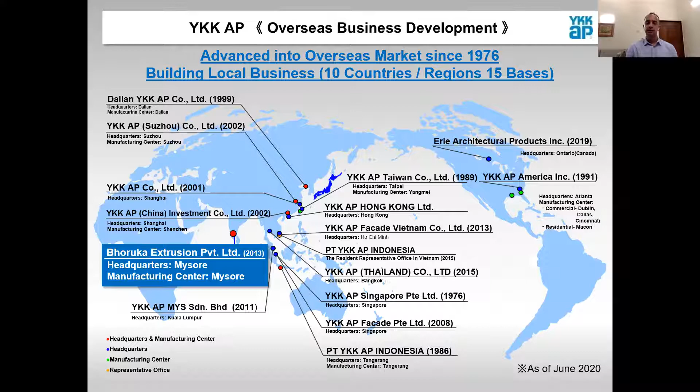Some of the accolades that we have received over the years in countries spread across the globe. For example, in the US, we have received the Product Innovation Award for 8 consecutive years. We have a very diverse portfolio in the US, right from doors and windows to curtain wall, hurricane windows, thermal break unitized curtain wall systems, which are very, very important for energy conservation. In Taiwan, we have been rated the top brand for 8 consecutive years. In Indonesia, we have won the award of top property for 2 consecutive years. And including various awards in China. This goes to show that YKK AP really understands the local market that we operate in. And once we understand the local market, we launch products over the years that are suitable to the local market, to the local climatic conditions, to the cultural influences of how people operate the windows, what they prefer.

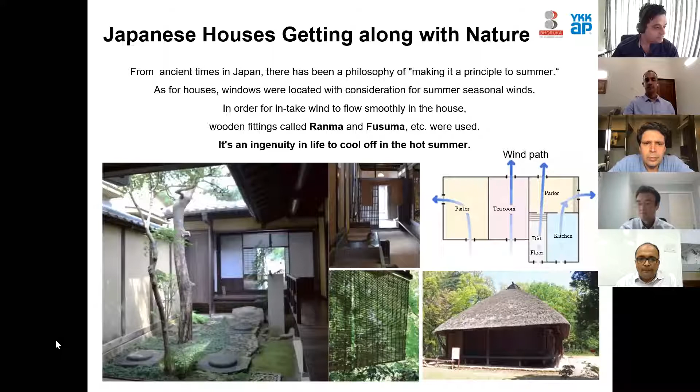These are the 5 ways in which the house can be comfortable with windows. First is to create air inlets and outlets. Second is to capture the wind according to the wind direction. Third is to increase the air vents.

Fourth is safe ventilation and consideration for safety. And fifth is to create a quiet environment. So I'll be explaining in detail about all 5 topics.

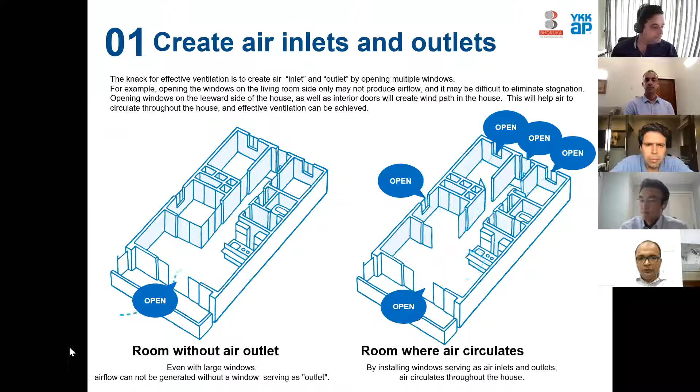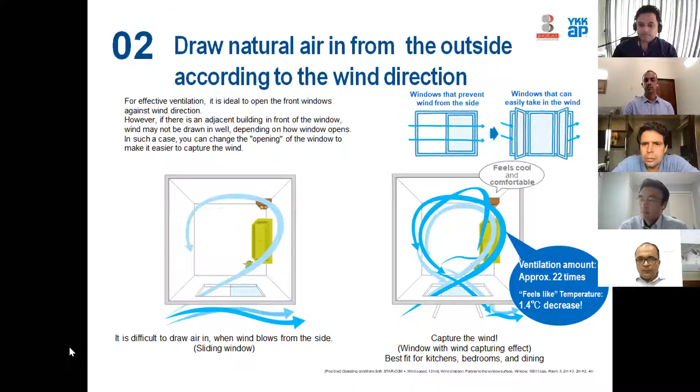This slide shows when the sliding window is replaced by a casement window, there is more ventilation as compared to a house having a sliding window.

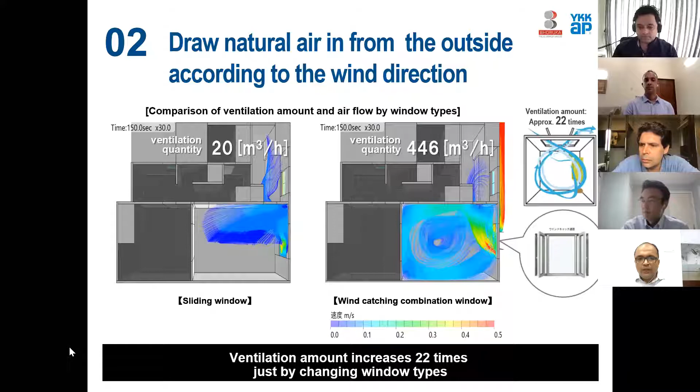We should also have an increase in air. The left side picture shows that air flow is less, and on the right hand side it shows the air flow is more because the intake and outtake of air is more.

So we can replace a standard sliding window with a sliding window that has a casement on the top.

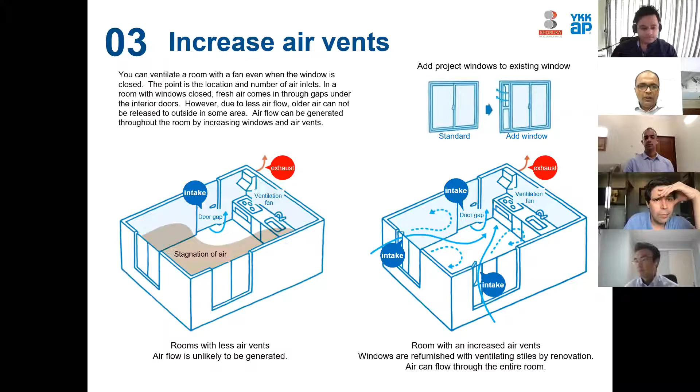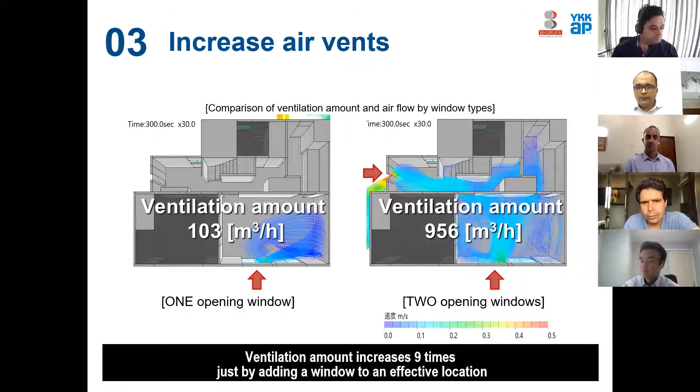On the left hand side, the photo shows there is opening of only one window, and on the right hand side it shows opening of 2 windows. So the ventilation amount increases 9 times.

It is very important to have a window with good ventilation, but the safety aspect also should be taken care of. So controlling the opening is very important.

If you see, we have a special safety lock. When you lock it, it opens only half, and it restricts the opening of the window to 110 mm. When you want to open it fully, it opens to 90 degrees.

So you can do easy cleaning. This is very good safety for the child.

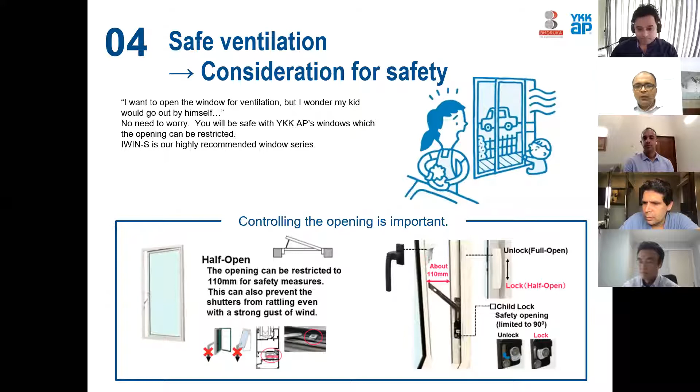It is also very important to have a quiet environment inside the house. It is said that if sound is lowered by 10 dB, then the human ear perceives that it is reduced to almost half.

So with our IWIN-S windows, we can reduce the outside sound by almost 30 dBs.

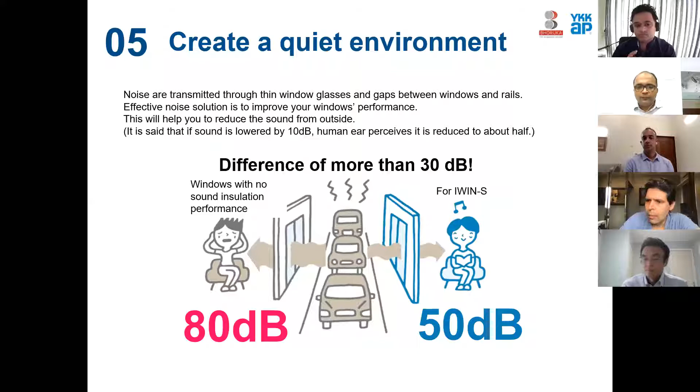As I explained earlier, these are the 5 ways to enhance comfort with windows, and we have recommended products which can address all 5. We can cover all 5 topics.

Great. I think that covered the ground well for the aspects of ventilation and how ventilation impacts our window systems and subsequently our interior spaces.

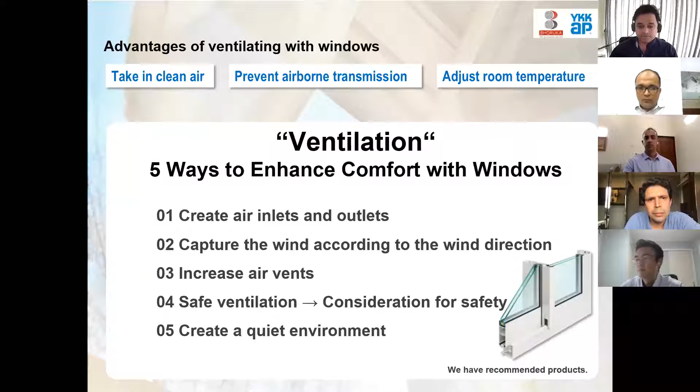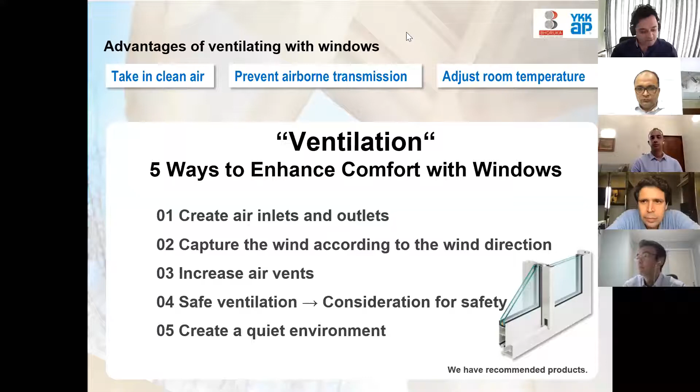Okay, great. I think close to 98% people would obviously want to incorporate natural ventilation in their window designs. So with that, I think we move to the next section, which is going to be a panel discussion. Given that we have laid the grounds really well for discussion over natural ventilation and safety, I would like to take up a few questions to our fellow panelists here.

The first question, I think, goes to the designer on the table first, to Carl. I think the large discussion is about what do developers or homeowners or people who choose a specific solution or kind of windows for their building or for their house, what do they expect from their windows? What are the expectations from a window solution? It could be about safety, ventilation, windows leak all the time. What in your experience has been the driver to go with one solution over the other?

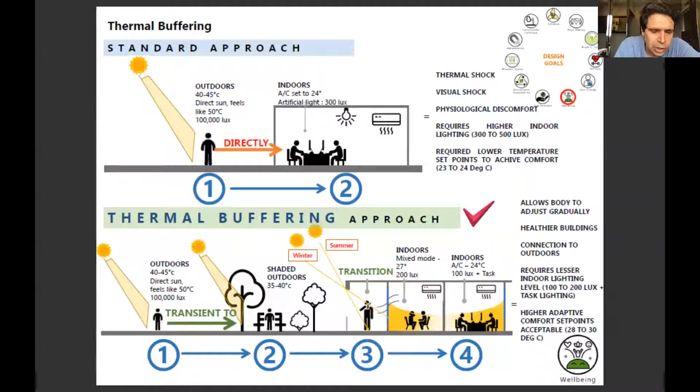You move into a shaded space, and then you further move into a transitional space, and then the interior, so that you allow your senses, your eyes, your ears, all of that to slowly calm down from an outdoor to an indoor environment, and vice versa. Because if you think about it from an out to in approach, it automatically becomes comfortable from an in to out approach as well. So you don't want to exit a glass box of a building directly into a 40 degree temperature environment. So this is where shading and selecting the right kind of fenestration becomes all the more important. So you can see these two diagrams that I show you on the screen.

On the top is a standard building design. You have an unshaded facade with lots of sunlight penetration. There is a guy sitting by the window having glare on his computer. And to defeat all of that, you put lots and lots of lights to make the space even more brightly lit, and you roll the blinds down.

Versus if you shade your building appropriately, you set your window in at the right depth, and you elevate your window from the floor to the perfect height, you are able to create a much more shaded and more comfortable environment for the indoors.

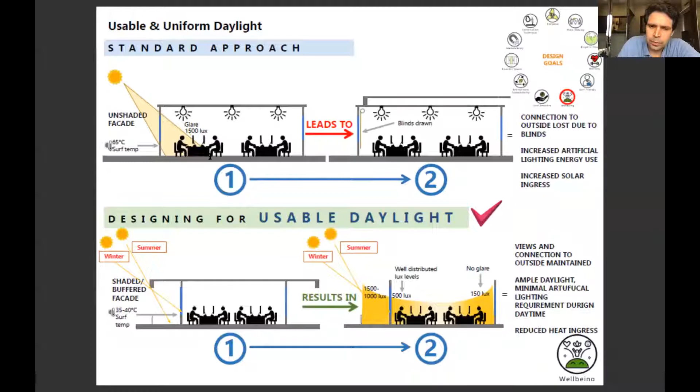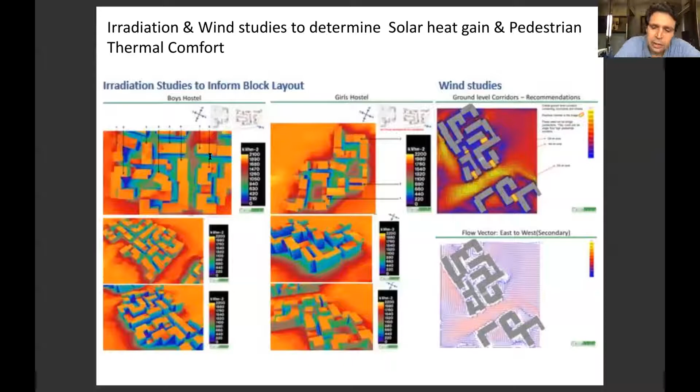You also need to look at your buildings from a wind perspective to make sure that you're able to capture and allow. I think in the YKK presentation, we could see the advantages of cross ventilation, that you have 9 times the amount of air flowing through your space if you have cross ventilation as opposed to if you don't. I mean, that's something that I didn't know up to today, that the factor is 9x.

And when you do this right, these are some facts that we want to bring out in today's presentation, that by doing the appropriate amount of study and choosing the right kind of facade, we've been able to design buildings that consume in fact 57% less energy, that use 40% less energy for air conditioning, 50% less watt per square foot for lighting, and 62% for your lighting energy targets.

These are all actual measured data after a 2-year life cycle of the buildings we're talking about. I wouldn't want to get specific, but the project that we're talking about is the Manipal University in Jaipur. So you can see lots of small windows, and through going through a very intense process of data-driven design,

we were able to design the largest campus in India which is GRIHA 5-star rated, a hostel campus of nearly 3,000 rooms, 6,000 beds, which has got LEED Platinum rating, and the largest net zero building in India of 3.5 lakh square feet, which is also the 3rd largest net zero building in the whole world.

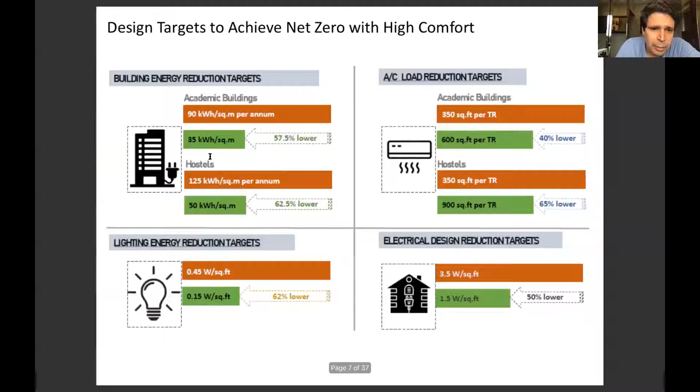And we were able to achieve this not just by doing acres and acres of solar farms, but really by bringing down, I'll go back a slide now, by bringing down the energy usage by almost 60%, and then optimizing it by using solar. And you can still create a beautiful architecture. There's no need to have fancy looking facades to get good energy efficient buildings. And I think these images demonstrate it.

The next project I'm just going to highlight is one that we are working on currently. It's a very complex circular hostel building with windows and fenestrations facing all the cardinal directions, north, south, east, west. So you have this very challenging, ever

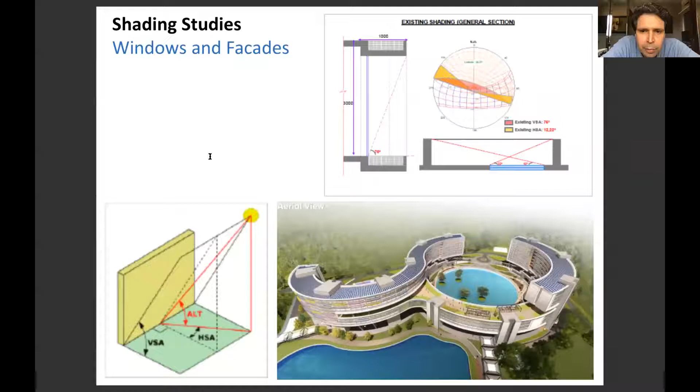That shows, I don't know if you can see my mouse. So this is the orientation of the building to your north, south, east, west. And these diagrams, this orientation reference shows you that on 0 degrees, on 22.5 degrees, 45 degrees, every 22.5 degrees that we turn the building, the heat gain changes. And based on the changed heat gain, we were able to identify a priority list.

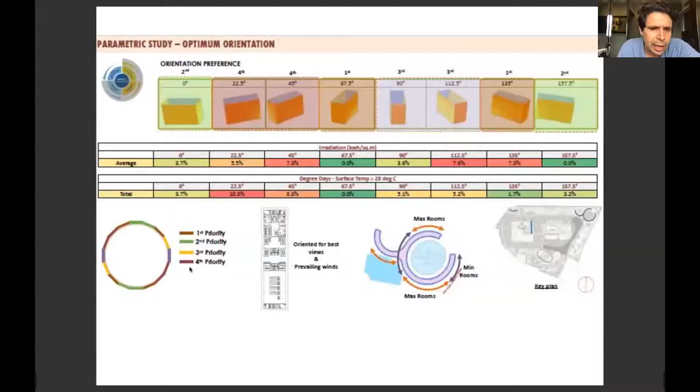So you can see the first priority. These are the facades that we're really concerned with, that we need to shade. And accordingly, the priority keeps reducing through the building. So information-based design really helps us choose the optimum fenestration. Some of these studies indicate that we've also done wind studies. We take this very, very seriously.

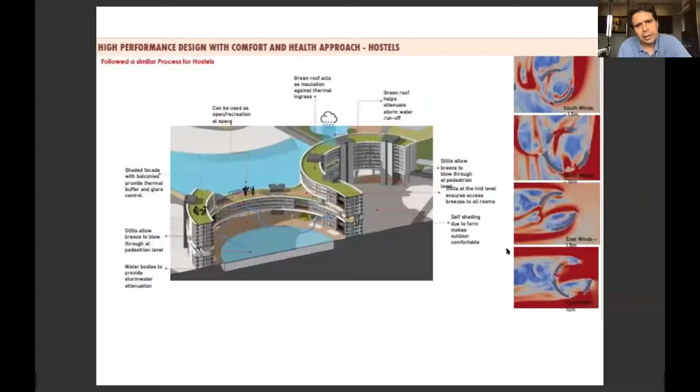So this is a double loaded corridor. We want to make sure that there's cross ventilation, so there's a lot of thermal comfort in the room. And some of these diagrams indicate the various facades of the building. So be it northwest, northeast, south, southeast, southwest, or north, you can see that the heat gain is completely different.

So you'll see all my north facades are blue. My southwest and southeast facades have maximum yellow and orange, especially in the lower half of the windows. We always think the south is the worst, but actually it's not. And as you again move to the northeast and the northwest, you can see more of blue creeping in.

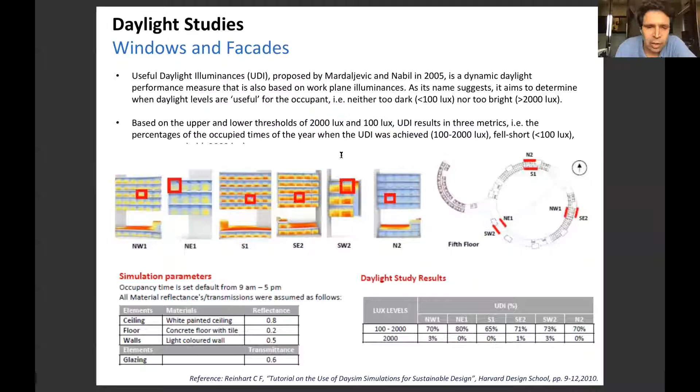So it's important to do these studies to understand how much lux level you want within your space to make sure the space is comfortable, and accordingly choose your fenestration. So just an example, you see a northwest window, what is the optimum amount of projection, what is the sunlight penetration, and therefore how much we need to reduce the size of the window or increase it based on the radiation.

So you can see here, this is your northwest case, where we need to reduce by 12% to keep the thermal comfort inside perfect. But if you go to a southeast, you need to reduce it by 25% to keep your thermal comfort appropriate. So there we introduce a parapet wall.

I think architects or the design fraternity who are not thinking about all these things actually don't care. And we have to start caring. We have to start making our buildings more responsible and start thinking about the facade and the elevation of the building, but also thinking about internal comfort.

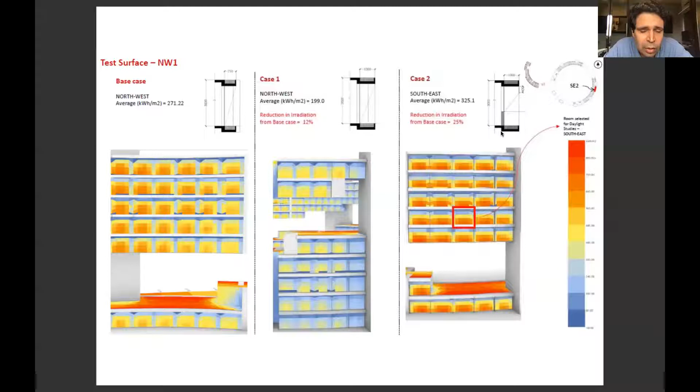Because if anything this pandemic has taught us, it's that people with homes which are not comfortable, which are not well cross-ventilated, we feel sorry for them because they're not living in comfortable homes, or they're not working in comfortable offices. If all this had been thought through at the design stage, I think things would be very different. So I'm just going to run you through a couple of other projects that are built.

So this is a project that we did in Thane for Lodha. You can see we strategically have made openings to make sure that the internal courtyards are well ventilated from a cross breezes point of view, but also from the point of view of the stack effect. You can see windows that need protection are protected with chhajjas.

This also takes care of the safety railing element. You can see these are small bedrooms, the windows brought down to the floor with the safety rail at an appropriate height.

Now I'm going to talk about one or two other projects where, over the last 5 to 7 years, our firm has been a market leader in thinking about what is today suddenly very relevant. Suddenly we talk about ventilation systems and this and that because it's the new thing to talk about with COVID. But these are things we've been slowly doing over the last 5-7 years as a matter of process and as a matter of trying to do better design.

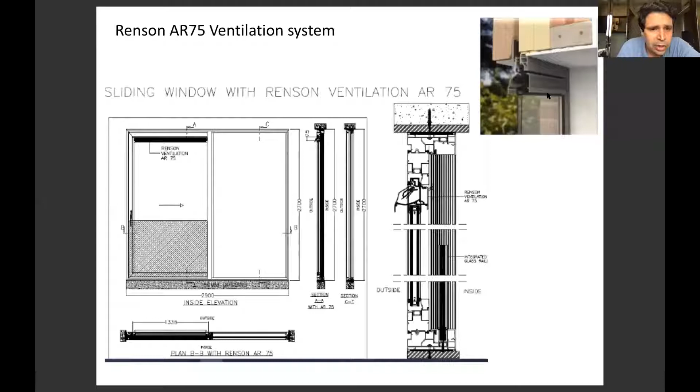This is also a seamless facade. So you can see in this image on the right-hand side, you don't see the glass railing because the glass railing is actually fitted within the sliding window frame. These are things we would like Indian manufacturers or international manufacturers who come to India to start looking at. Indians love opening their windows and standing at the edge and being connected to the world outside.

So these are some of the details that we indigenously developed and enforced onto our fabricators. And we're glad to say that our fabricators for this project, we worked with Doors and Doors, and they were able to deliver the windows and the system the way we wanted it. So you can see here is a full sliding door system with a glass railing with a protection rail, and you can stand inside your house and clean most of it.

We did face some ergonomic issues on the right hand side, which you'll see in subsequent slides. We fixed it in projects to come. When we tried opening the window, our hand would keep hitting the glass railing. This is what the project looks like in its completed form.

This is another project we're doing with the same developer, and we tried to take this idea of ventilation systems forward. So what you see here is a sliding window system with a vertical ventilator fixed within this system. This is an actual photograph at the site. We've gone with the system designed by Renson from Belgium, and the window system is done by Schueco, and the vertical frame is taken off from the wall, with the customized Renson system fitted on the right hand side.

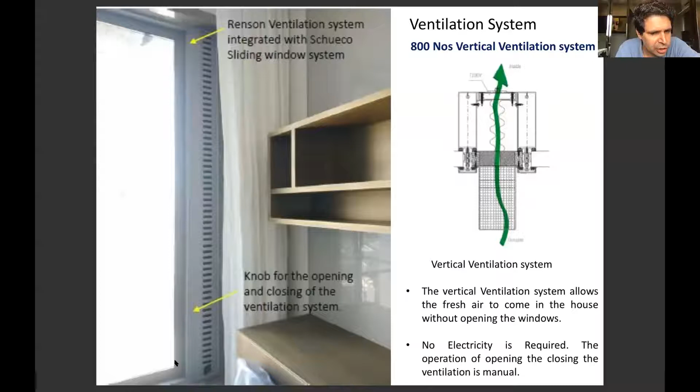So you can see what this does is it allows fresh air to come inside the house, and there's a simple knob at the bottom near the skirting level where you can just turn it off at night when you turn on the air conditioning. But for the rest of the day, you have cross ventilation and fresh air with a drop in humidity entering your house throughout the day.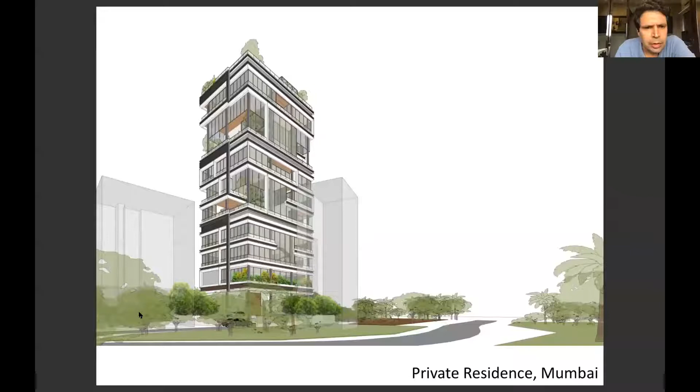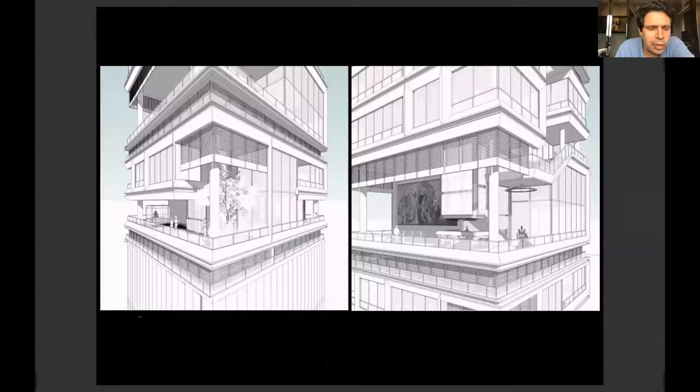Here I want to talk about another private residence we're doing in Bandra, Mumbai. This is a very different type of project with 7-meter high windows. Again, here what we've done is gone with a different system of ventilation, using Renson to bring in ventilation from the outside.

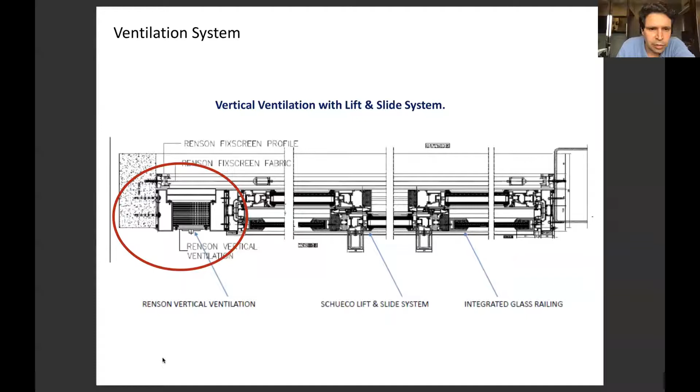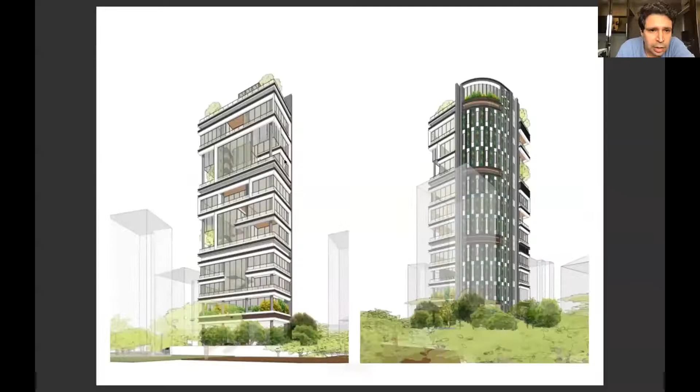So you can see this is the elevation. It's a 7-meter tall glazing, double height. If I go back to the facade, it's this area here on the top, and we have a vertical vent 7 meters tall throughout the entire height of the facade.

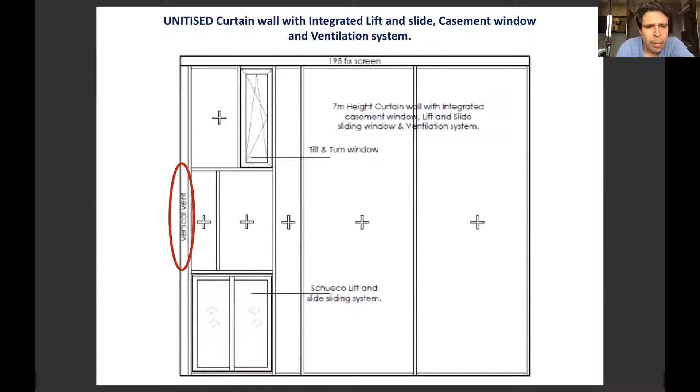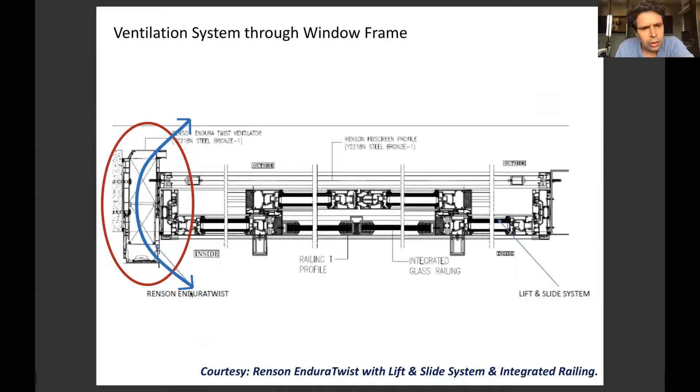We have fixed windows here, a lift and slide here, and a tilt and turn. And this is the kind of EnduraTwist system to bring in ventilation from the side, but not allow any water or other things in. So this is how the system works - it goes from the side and enters. So you have a significant drop in humidity as well, and it's pretty easy to maintain.

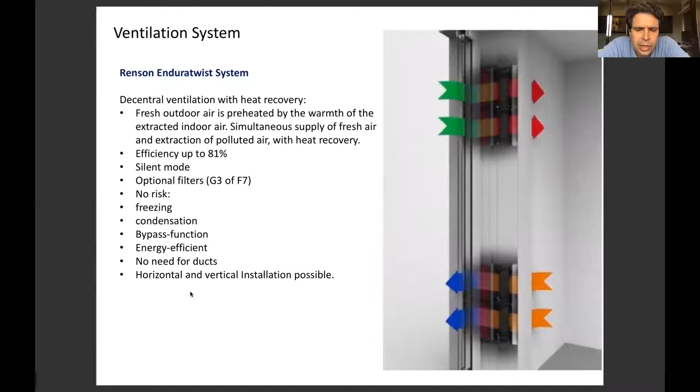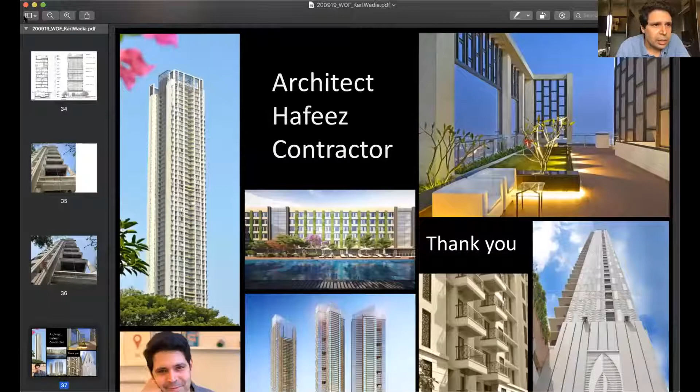So yeah, that's all from me, Gautam. The idea was just to touch upon the fact that these are things that need to be thought of, and I'm glad the platform has suddenly become larger, and the whole idea of expediting this is suddenly going to take place as a matter of urgency.

Great, thanks, Karl. I think clearly some very interesting touch points there about the experiential nature of these elements on the building - how you experience it from the inside, the safety aspect, ventilation very well touched upon. I think we've been getting quite a few questions, so before we move into the next section of the panel, let's take up some questions.

The very first question we received was specifically about one slide, I think in Baiju's presentation, on why a casement window is more functional than sliding. This is from Labdi Kumari. It spoke about the entire ventilation loop created from a sliding window versus having two casement windows. So I think either Baiju or Shita-san can take this one.

Yeah, basically the window is coming - the direction is just straight to the building. Then this window is coming around along the building, so that the window direction will be along with the building facade. Therefore, if you just intake the window from 90 degrees, with a sliding window, the volume of air intake is also the same, but for surrounding airflow you want to intake - in this case, casement window is more effective.

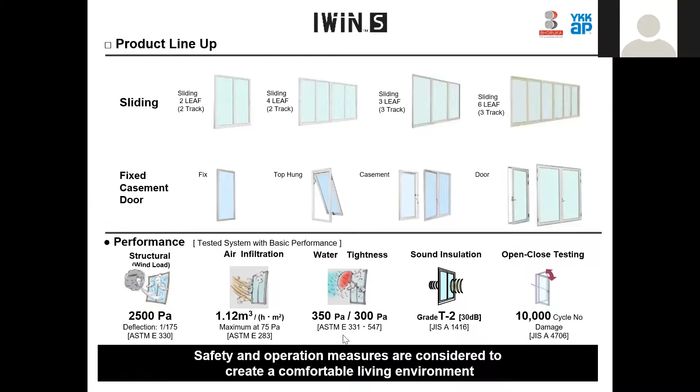Next is about the performance and product lineup of IWIN-S. The structural performance is 2.5 kPa, as we have tested. The air infiltration is 1.12 meter cube at 75 pascals. The water tightness is 350 and 300 pascals, depending on the type of sill we use. We have two different types of step sill - this is the step sill, where there's a difference in height between the outer track and the inner track, and this is the flat sill. So we use two types of sill, and because of that we achieve the water tightness.

This slide talks about air tightness and water tightness. For air tightness, we use hard and soft gaskets depending on the section where there is contact with the profile. We don't use wool pile in our system, and by using different types of gaskets, we are able to achieve better air tightness.

For water tightness, we use a step system, which enables us to give very good water tightness of 350 pascals. The sealer pad is designed to keep water from entering and give sufficient water tightness. We use sealer pads at all four corners of the window.

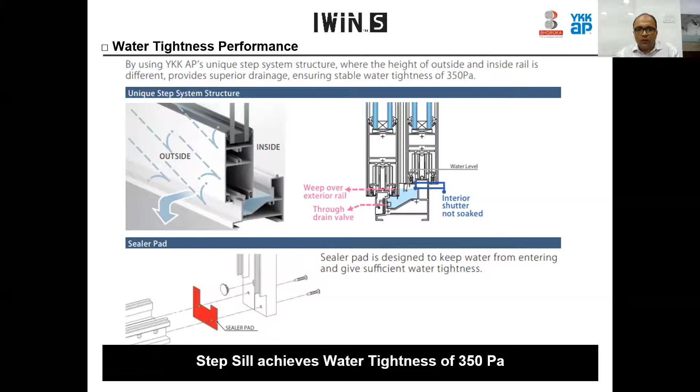Next is the chart of the noise environment we live in. Noise reduction is dependent on the use of the glass, but our IWIN-S system is designed in such a way that you can reduce almost 30 dB by using a DGU glass.

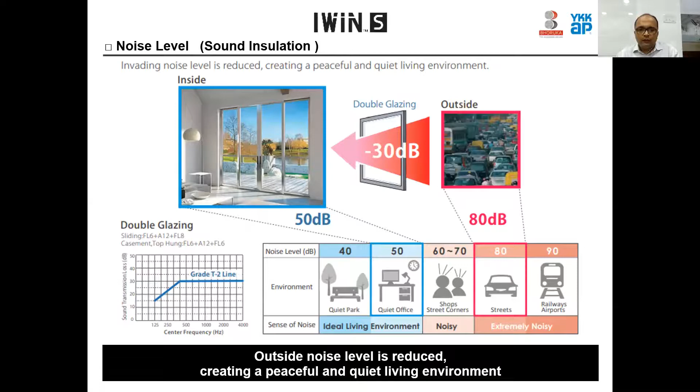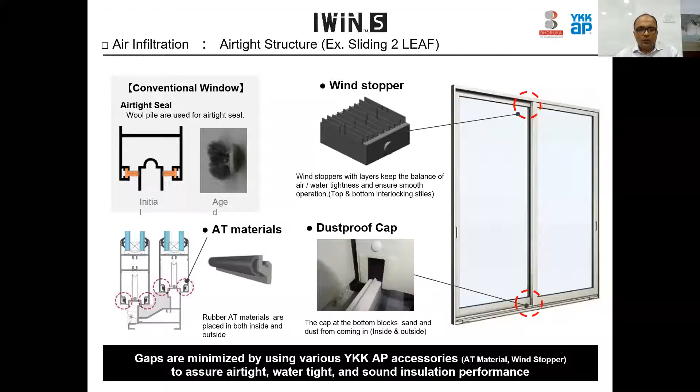Then this is about the wind stopper. We use wind stoppers with layers, which keep the balance of air tightness and water tightness and ensure smooth operation. We also use a dust proof cap at the bottom, so there is very little chance of dust coming inside, giving very good air tightness. As discussed earlier, we don't use the conventional wool pile, but soft and hard gaskets depending on the section where there is contact with the profile.

This is about the in-house testing we have done. We have tested almost 30,000 times of opening and closing the shutter, and found there is no disorder in operation. This is almost equivalent to 10 years of usage, based on 8 times opening and closing per day.

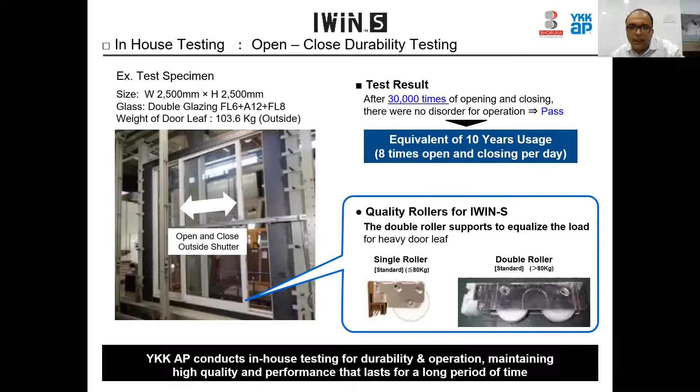Also, for weight greater than 80 kgs, we use our double roller. This is the double roller we are using. So for weight greater than 80 kgs, our standard is the double roller.

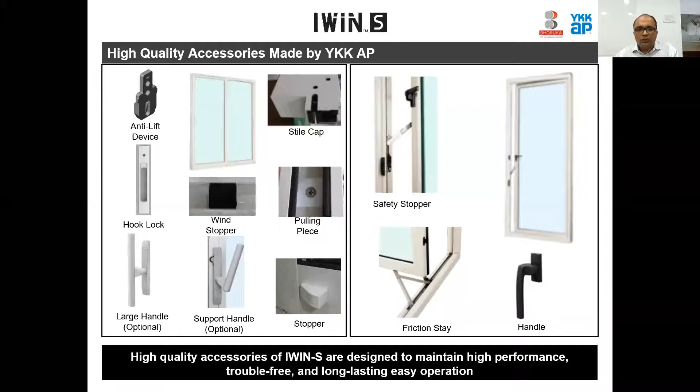This is high quality accessories which are made in-house, as Mr. Rajat explained. Everything we manufacture is in-house, like the anti-lift device, the hook lock, the large handle, support handle, end stopper, stile caps, friction stay, and the handle. So everything is manufactured in-house. The profiles are also manufactured in Bhoruka in Mysore. We also give finish options of powder coating and anodizing, which is also done in-house.

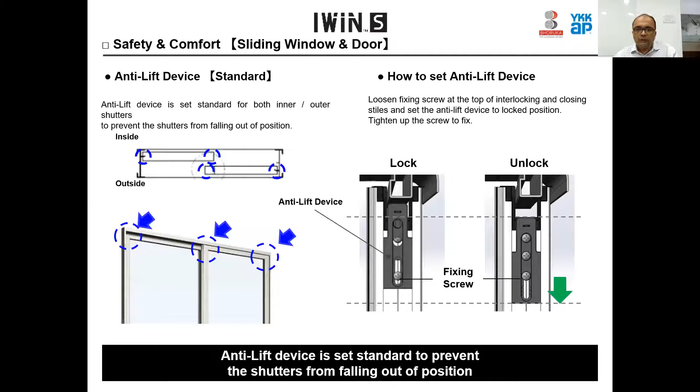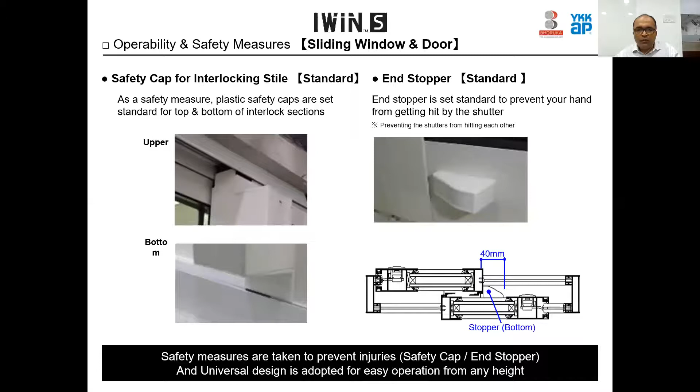This slide talks about the safety cap. There is a safety cap at the upper end and lower end of the interlocking section. There is also the end stopper, which is used to prevent the hand from getting hit by the shutter. By using the end stopper, the fingers are prevented from getting caught in the window.

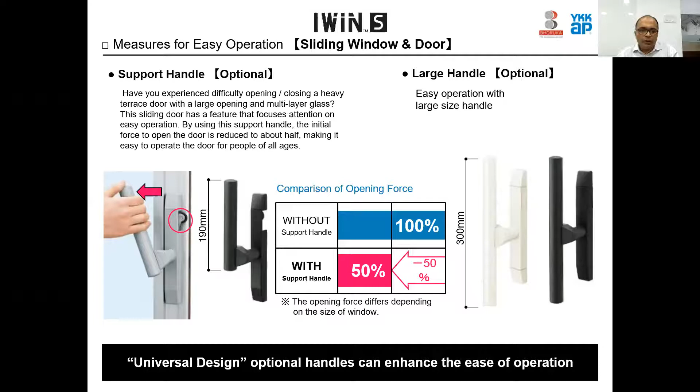Then this slide talks about the support handle. Have you experienced difficulty opening very heavy sliding shutters with multi-layer glass? We have a solution with the support handle, which focuses on easy operation. By using the support handle, the initial force to open the door is reduced almost to half. If you see the chart, without using the support handle, the initial force required is almost 100%, but with the support handle it reduces to almost 50%. So it is very good for initially opening the windows, and then you can easily slide it.

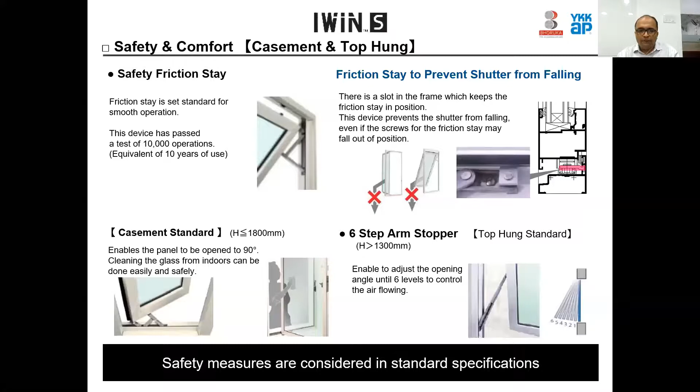Yeah, so this was the presentation for the IWiN S.

Great, thanks, Baiju. I think there are quite a few interesting features which bring good value in the experiential aspects of using windows, as well as critical factors like safety. I think everybody has picked up some features they liked. Maybe we can get the next poll on screen about which features they think are most important: water tightness, noise reduction, air infiltration, high quality accessories, and operability and safety. Can we have the answers over the next 30 seconds, please?